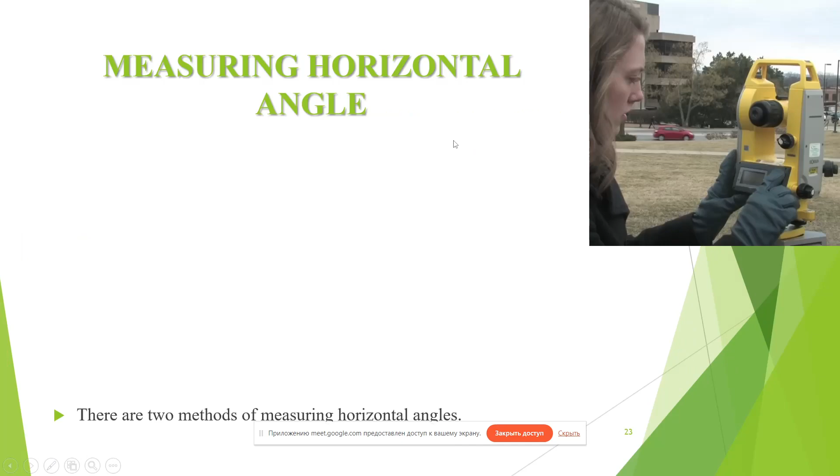Well, measuring horizontal angle. There are two methods of measuring horizontal angles.

The repetition method is used for very accurate work. In this method, the same angle is added several times mechanically, and the correct value of the angle is obtained by dividing the accumulated reading by the number of repetitions. The number of repetitions made usually in this method is 6, 3 with the face left and 3 with the face right. In this way, angles can be measured to a finer degree of accuracy than that obtainable with the least count of the vernier.

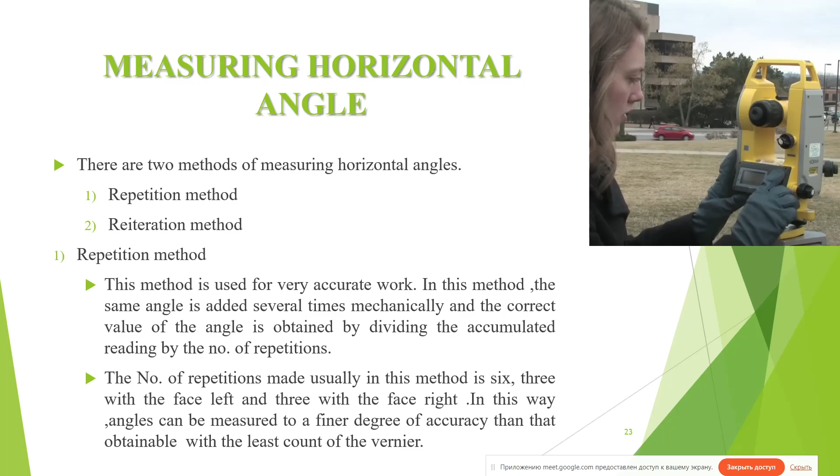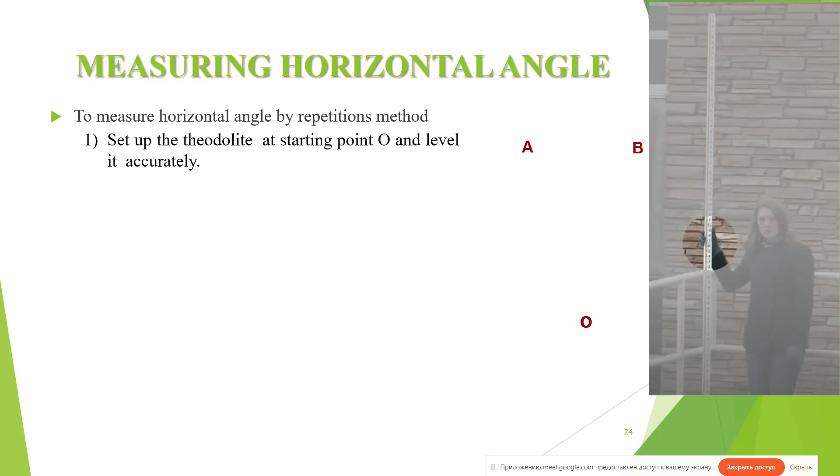To measure horizontal angle by the repetition method, we set up the theodolite at the starting point O and level it accurately. Measure the horizontal angle AOB.

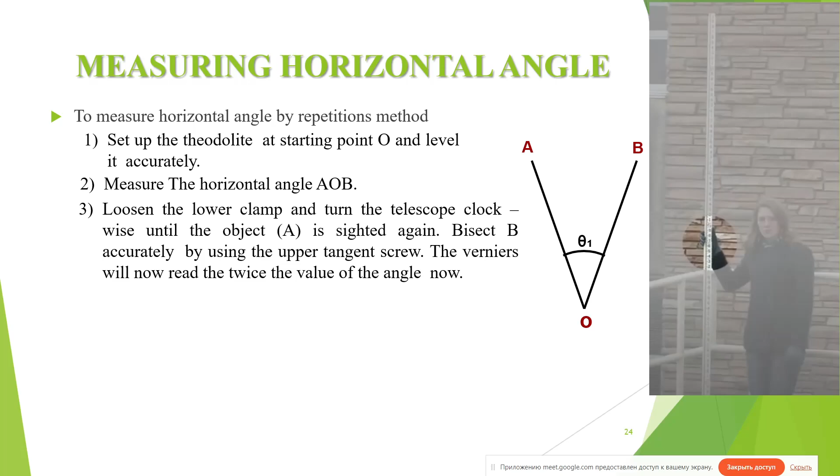Loosen the lower clamp and turn the telescope clockwise until object A is sighted again. Bisect B accurately using the upper tangent screw. The verniers will now read twice the value of the angle.

Repeat the process until the angle is repeated the required number of times, usually 3. Read again both verniers. The final reading after n repetitions should be approximately nx, where x is the size of the angle.

Divide the sum by the number of repetitions, and the result obtained gives the correct value of the angle AOB. Then change the face of the instrument, repeat exactly in the same manner, and find another value of the angle AOB. The average of the two readings gives the required precise value of angle AOB.

The face of the instrument is changed and the previous procedure is followed.

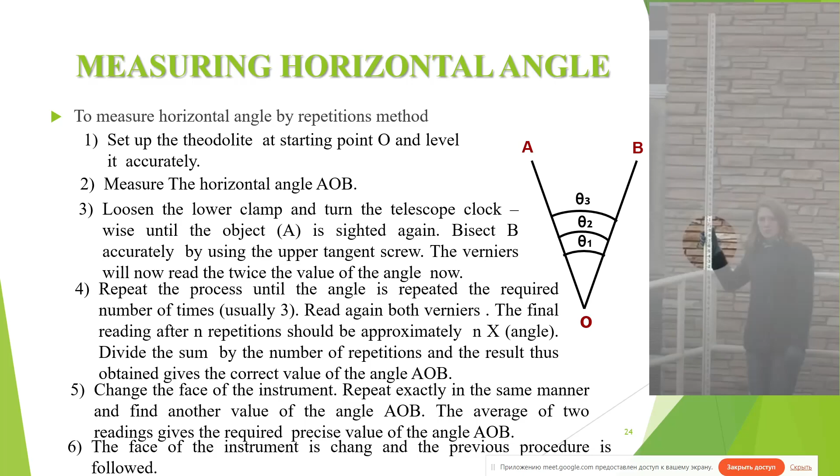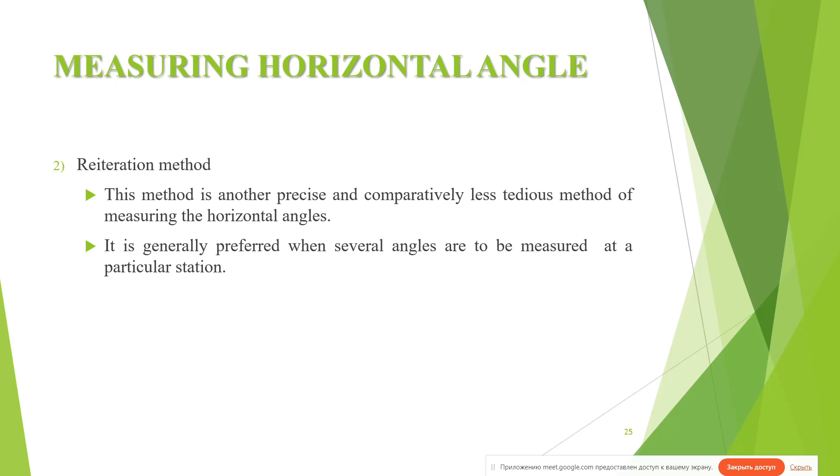Reiteration method. This method is another precise and comparatively less tedious method of measuring horizontal angles. It is generally preferred when several angles are to be measured at a particular station. This method consists in measuring several angles successively and finally closing the horizon at the starting point. The final reading of vernier A should be the same as its initial reading.

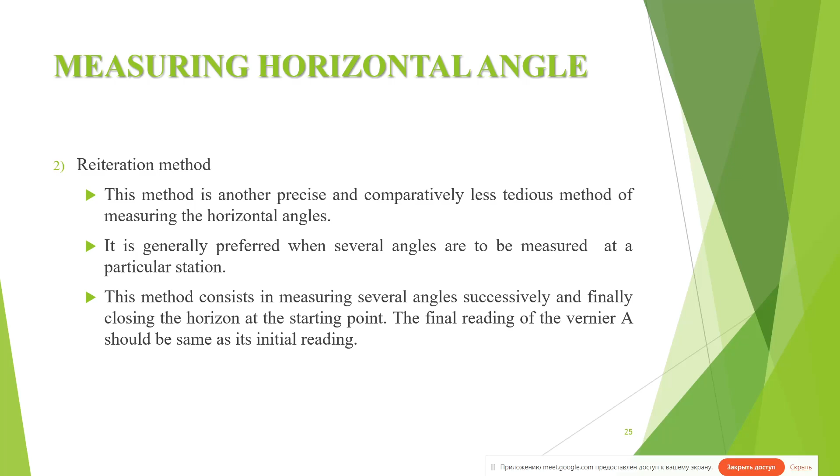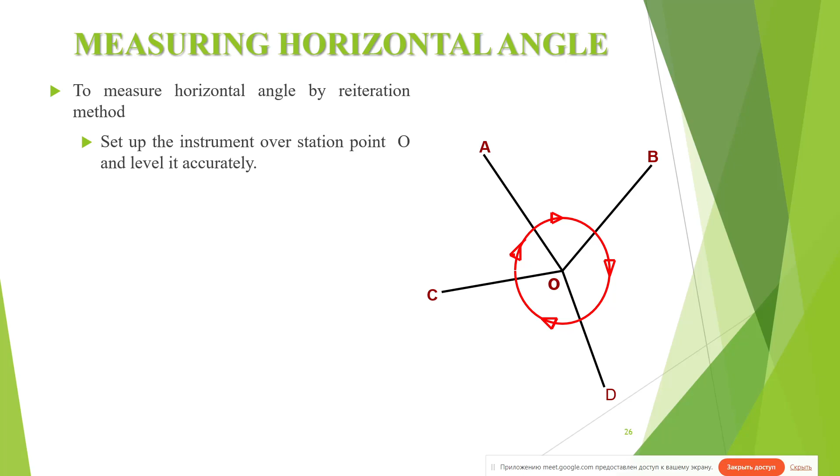To measure horizontal angle by the reiteration method, set up the instrument over station point O and level it accurately. Direct the telescope towards point A, which is known as a referring object.

In geodetic measurement, we use the term referring object. For example, it can be the previous point of our traverse, or it can be a precise geodetic mark of a triangulation network, etc.

Bisect the telescope accurately and check the reading of vernier as 0 or 360. Loosen the lower clamp and turn the telescope clockwise to sight point B exactly. Read the verniers again and the mean reading will give the value of angle AOB.

Similarly, bisect C and D successively. Read both verniers at each procedure. Each bisection finds the value of the angle BOC and COD. Finally, close the horizon by sighting towards the referring object, point A.

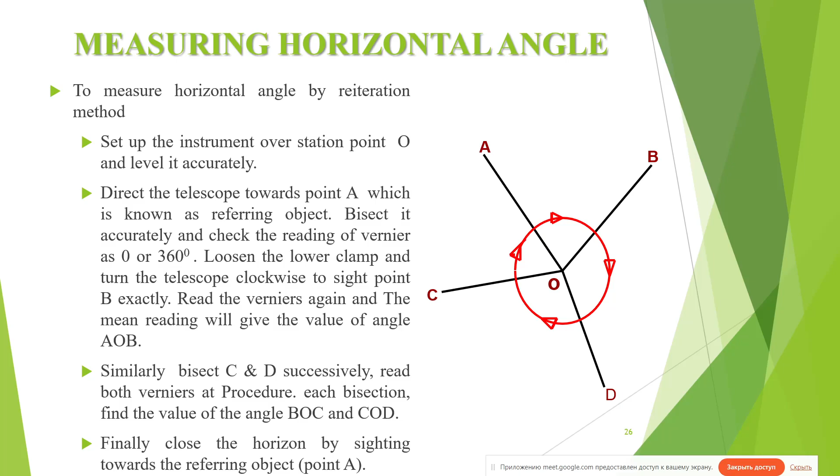The vernier A should now read 360 degrees. If not, note down the error. This error occurs due to slippage, etc. If the error is small, it is equally distributed among the several angles. If large, the readings should be discarded and a new set of readings taken.

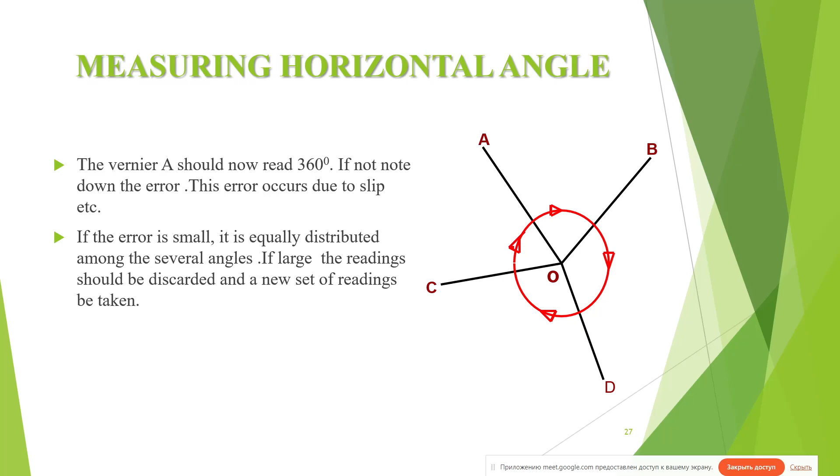Another kind of work is measuring vertical angle. To measure the vertical angle of an object A at a station O, set up the theodolite at station O and level it accurately with reference to the altitude bubble.

Set the zero of the vertical vernier exactly to the zero of the vertical circle using the clamp and tangent screw. Bring the bubble of the altitude level to the central position using the clip screw. The line of sight is thus made horizontal and the vernier still reads 0.

Loosen the vertical circle clamp screw, direct the telescope towards object A, and sight it exactly using the vertical circle tangent screw. Read both verniers on the vertical circle. The mean of the two vernier readings gives the value of the required angle.

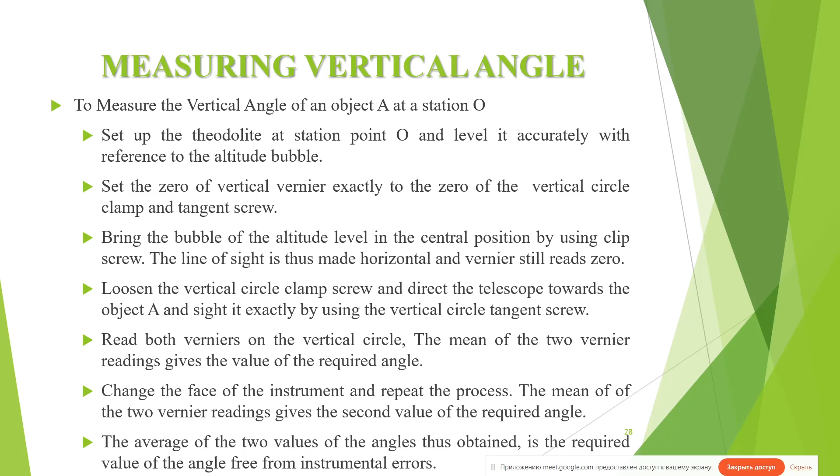Change the face of the instrument and repeat the process. The mean of the two vernier readings gives the second value of the required angle. The average of the two values of the angles thus obtained is the required value of the angle, free from instrumental errors.

We can also compute latitude and departure with the theodolite. The latitude of a line is its orthographic projection on the north-south axis representing the meridian. Thus, the latitude of a line is the distance measured parallel to the north-south line.

Thus, latitude L is equal to L cosine theta. The departure of a line is its orthographic projection on the axis perpendicular to the meridian. The perpendicular axis is also known as the east-west axis. Thus, departure D is equal to L sine theta.

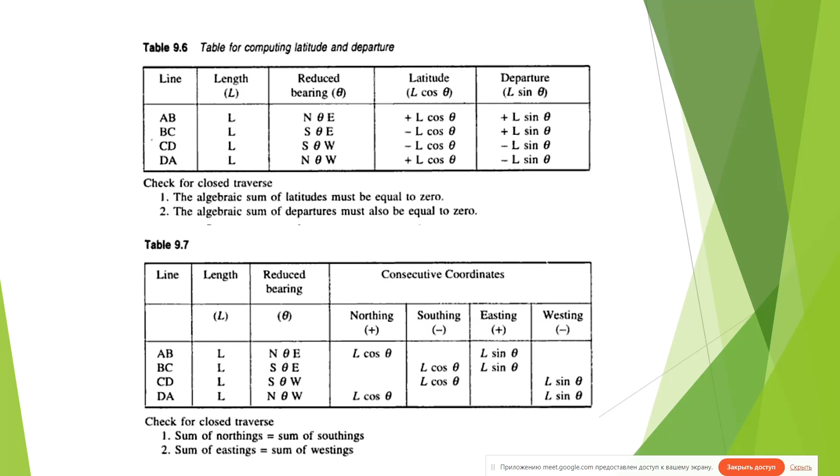Consecutive coordinates. The latitude and departure of a point calculated with reference to the preceding point are said to be the consecutive coordinates of that point.

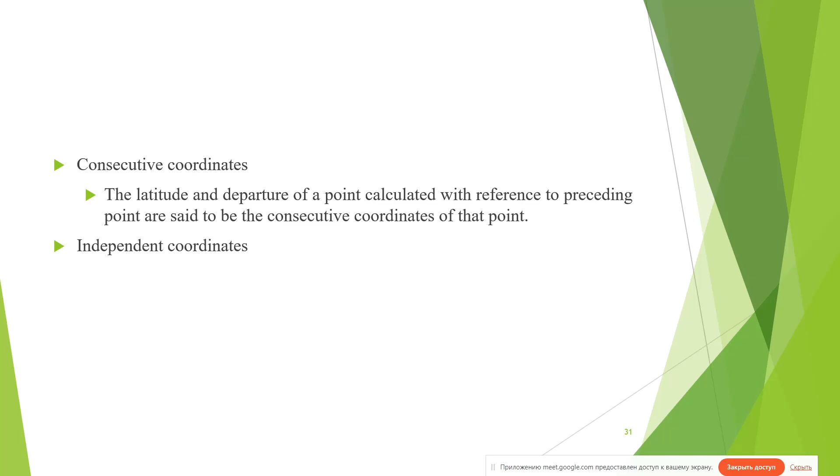Independent coordinates. The coordinates of any point with respect to a common origin are called the independent coordinates of that point. The origin may be a station of the traverse or a point entirely outside the traverse.

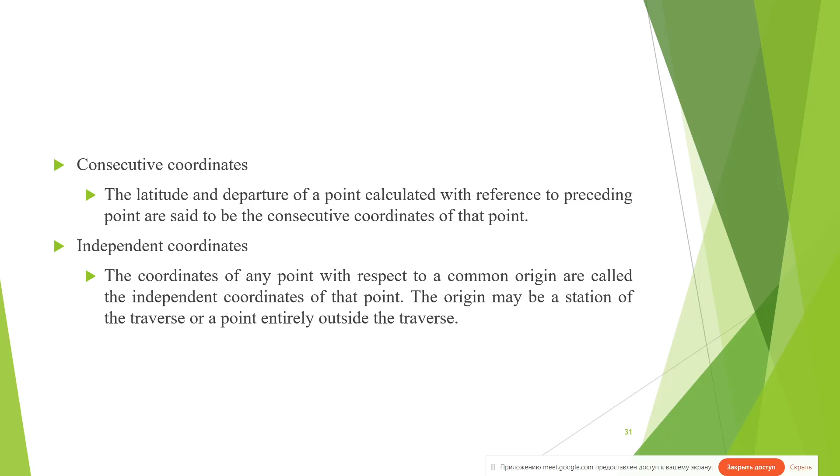Balancing of the traverse. A traverse is balanced by applying corrections to latitudes and departures. This is called balancing a traverse. The following are common methods of adjusting a traverse: Bowditch rule, transit rule, third rule, and graphical construction method.

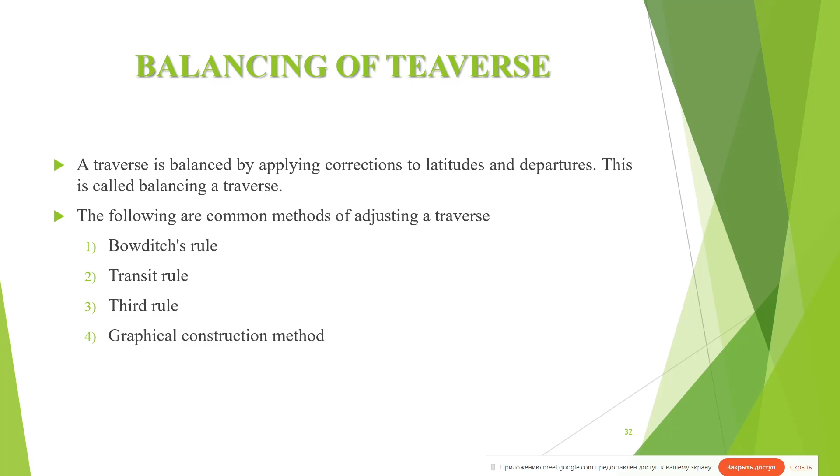The Bowditch rule, also termed the compass rule, is mostly used to balance traverses when linear and angular measurements are equally precise.

You can see the equation: correction to latitude or departure of any line is equal to the length of the line divided by the perimeter of the traverse, times total error in latitude or departure.

Transit rule. The transit rule is used to balance a traverse in which the angular measurements are more precise than the linear measurements. In this case, you can see another equation.

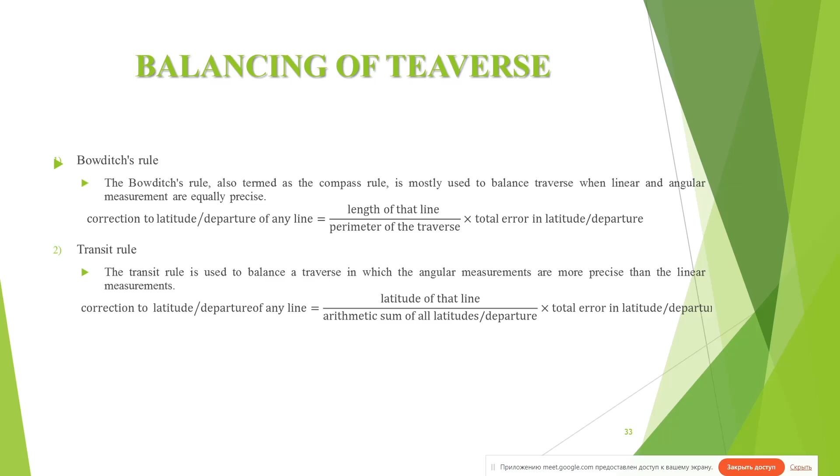Third rule. If the corrections are to be applied separately, then the third rule may be used. You can see the formula.

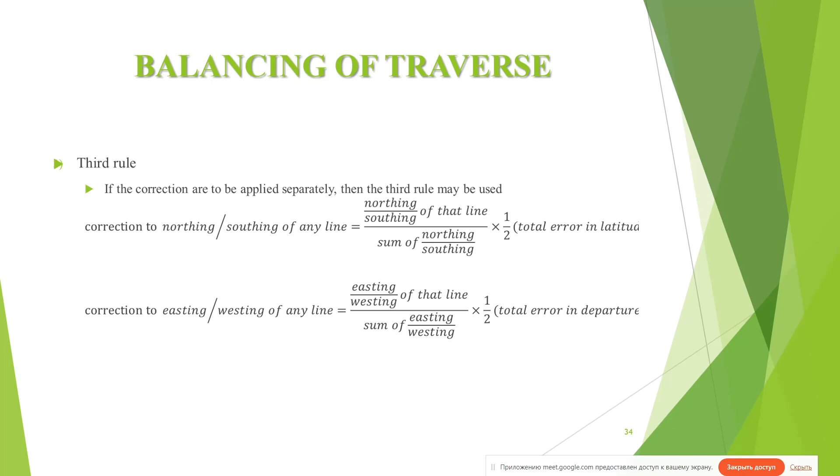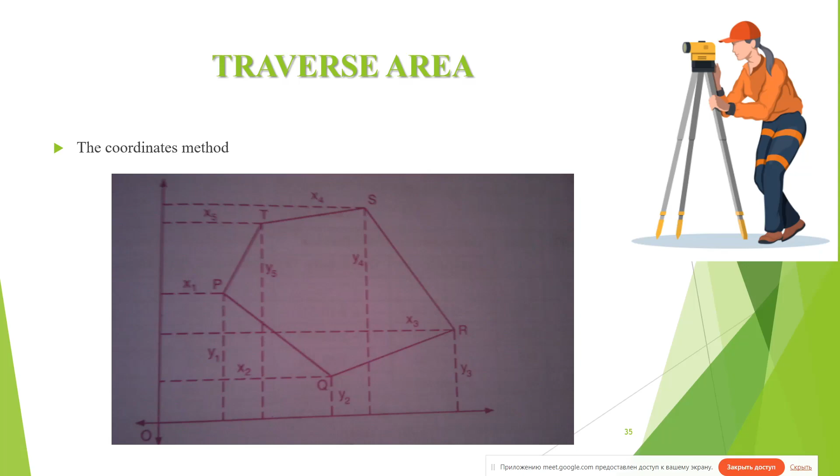Well, here you can see a traverse area, a sketch of the traverse area, and the coordinates method that allows you to create this schema yourself.

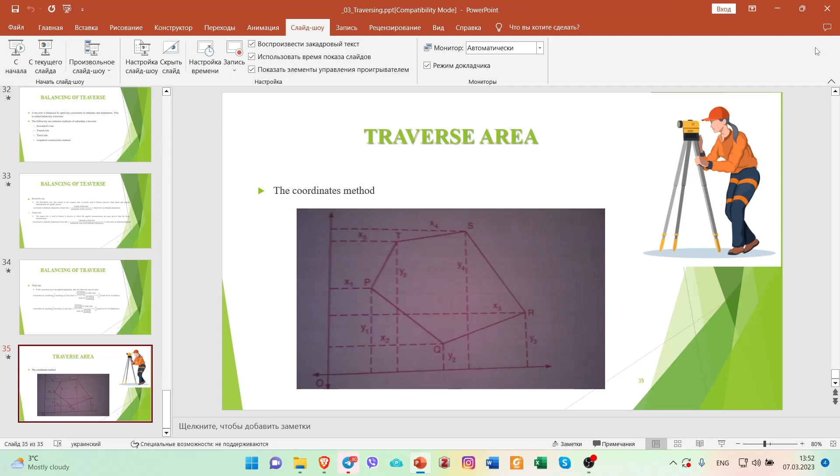Well, let's move on. Now we try to work with simple tasks, very simple tasks that we used to - let's speak about geodetic calculations.